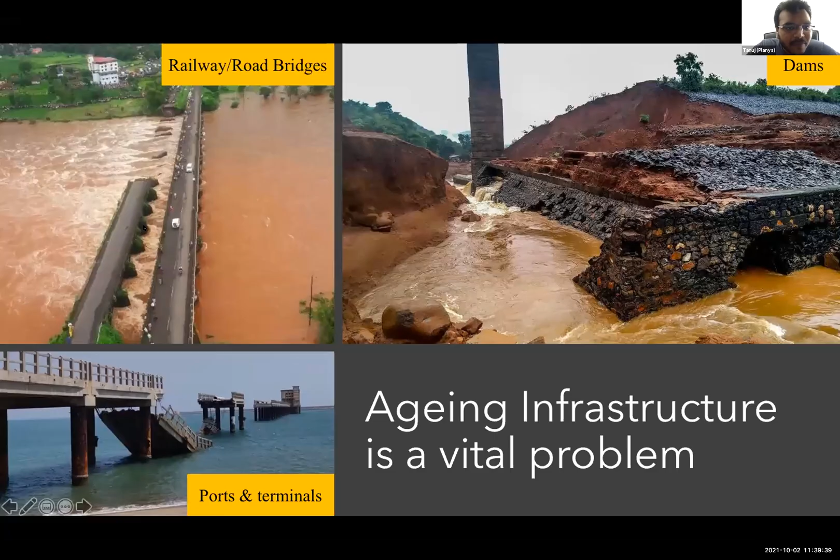So today, divers do these inspections. They go underwater with scuba gear, with cameras, sensors, and collect different data. But being human, going underwater is like going into space - you need a space suit there, so you need a suit here. There are a lot of limitations because you can't go deep, the pressure will kill the person, you can't have unlimited oxygen supply because they cannot breathe through water, and of course there is a lot of safety risk with all these parameters involved. So human divers have several limitations in going to high depths, capturing useful data, and then relaying that to the experts to tell them exactly what the problem is.

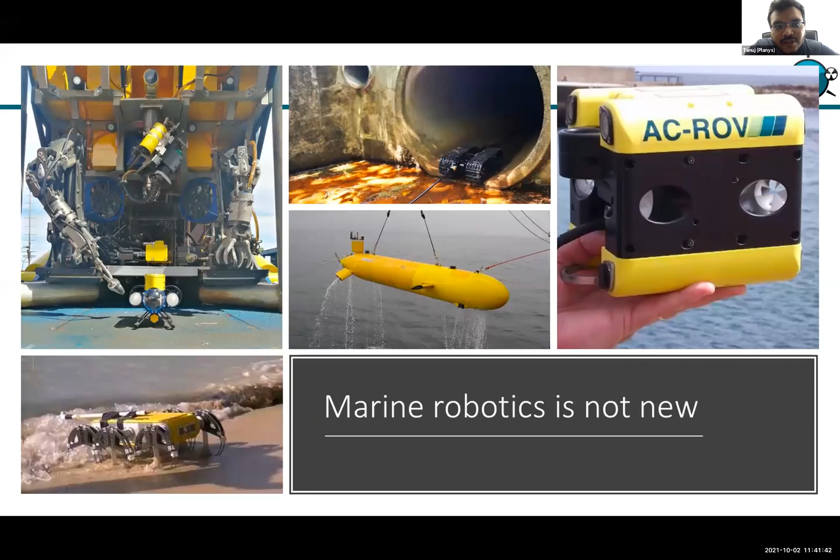So this is not new. The Titanic was found through using one of these.

This is typically the setup that happens. You have the ROV, the remotely operated vehicle, the technical word for an underwater robot that is deployed. It is connected with a cable to a control station. Then you have a ROV pilot, like you have an airplane pilot, who controls the machine from a joystick. And engineers or experts can see the data live stream.

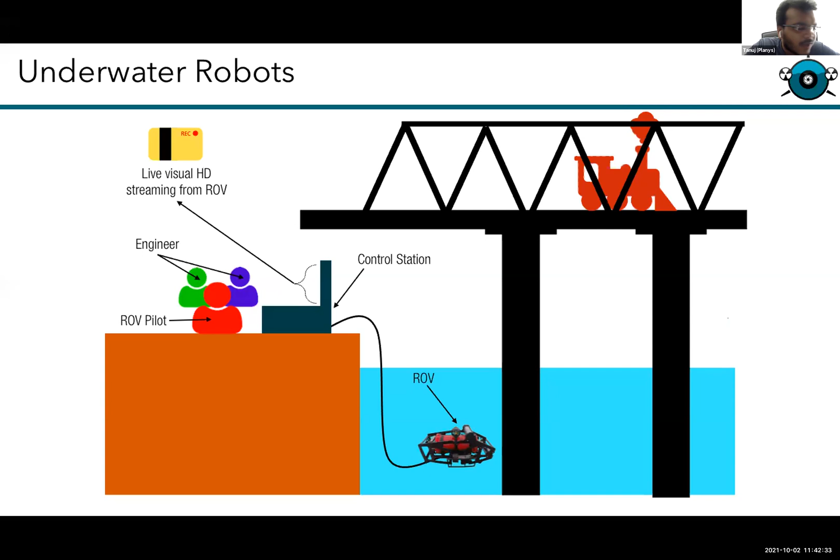This can be done without dismantling the asset, like a bridge. So the trains can go on, but the data collection still happens of the foundations and underwater structures. It's very safe, very robust, with a lot of sensors assisting in these robotic technologies. And there's no battery limitation because the cable brings it power from outside, so theoretically we can have unlimited endurance.

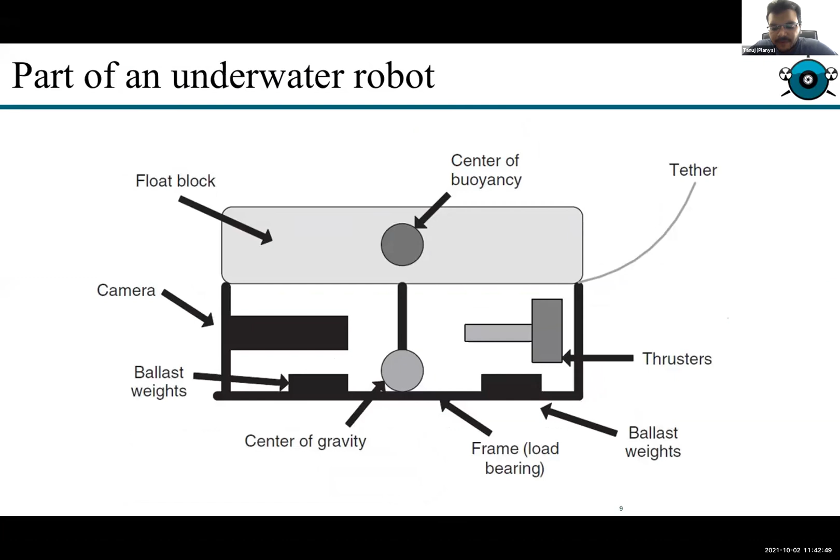So these are the different parts of the robot. As you can see, it's quite sophisticated. You have propellers, cameras, lights, manipulator arms. You have a lot of cabling, and a chassis on which it's mounted. On top, you have an emergency beacon to find it in case it gets lost, or to know where it is. So it's like a small transformer itself.

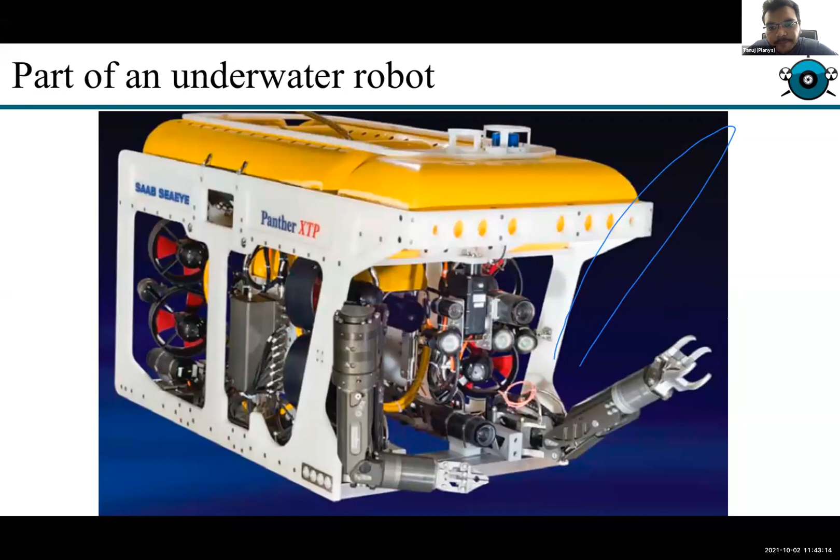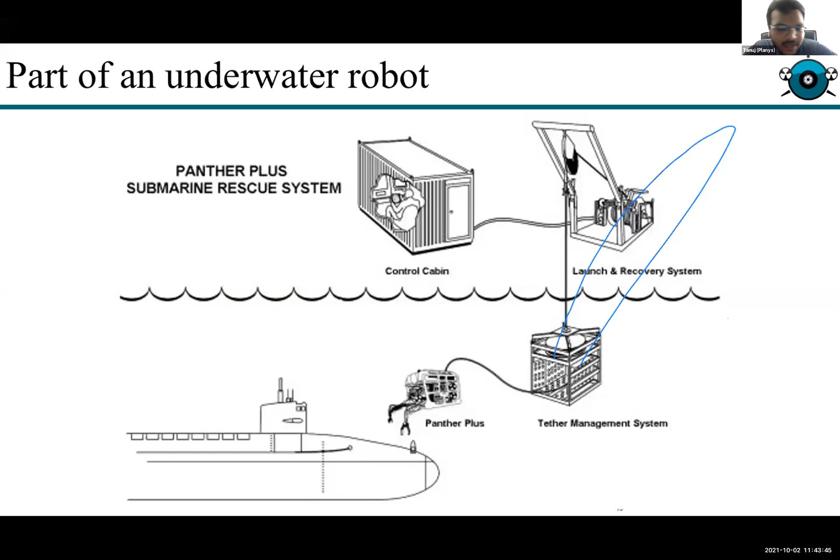This is the setup. On the top left, you see a control room where the data comes in live. You have several monitors, screens, a joystick, and the operator controlling it. Then the cable goes to a launch and recovery system, which is a crane, and it's deployed underwater, and you can inspect submarines, underwater structures, and several things from it.

So the applications for this could be in offshore oil and gas, where you have a lot of underwater structures, and oil is very important today. We know the world is moving to more renewable energy, but as of today, oil is important, and these structures will lead to issues if they fail, like oil spills. Hence inspecting these is very important.

Similarly, port structures are very important for movement of cargo around the world. Dams too, I think I've given enough examples of dams, and bridges as well. People from Mumbai know the importance of the sea link, and if something happens to that, there is going to be a lot of discomfort on a daily basis. So these are the different applications.

Of course, there are more applications, like for defense purposes. Navy could use this for coastal monitoring and coastal surveys. Secondly, you could do a lot of environment monitoring with these technologies for underwater data collection, seismic activity, and so on. So that covers the different use cases, with some photographs.

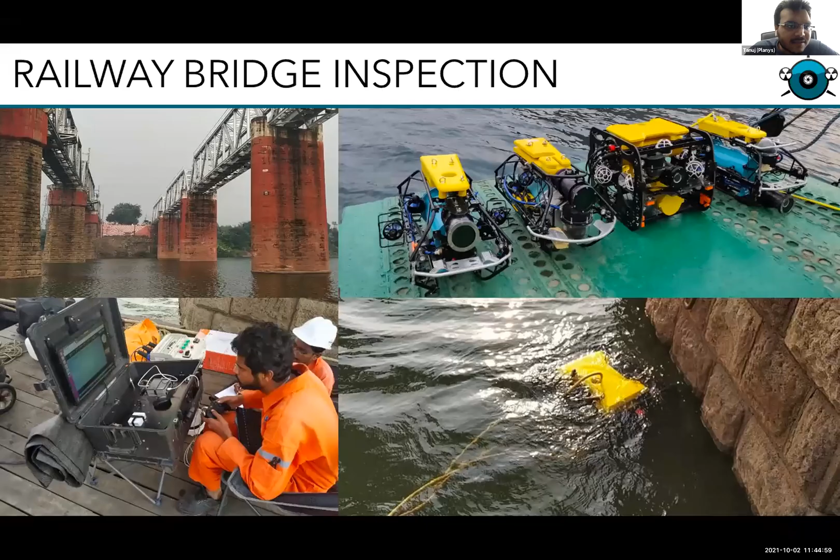Our small company has been using this for the Indian Railways. As you can see, these bridges are very old, built by the British. We use small vehicles, small boats, on which we set up these systems. On the left bottom, you can see that photograph, our operator controlling with a PlayStation joystick on a small screen. We install this and move the robot in water to collect different data.

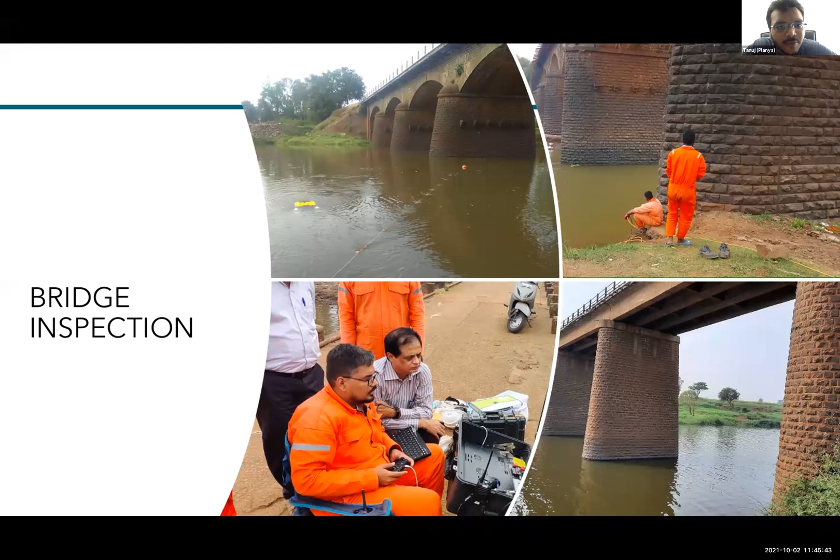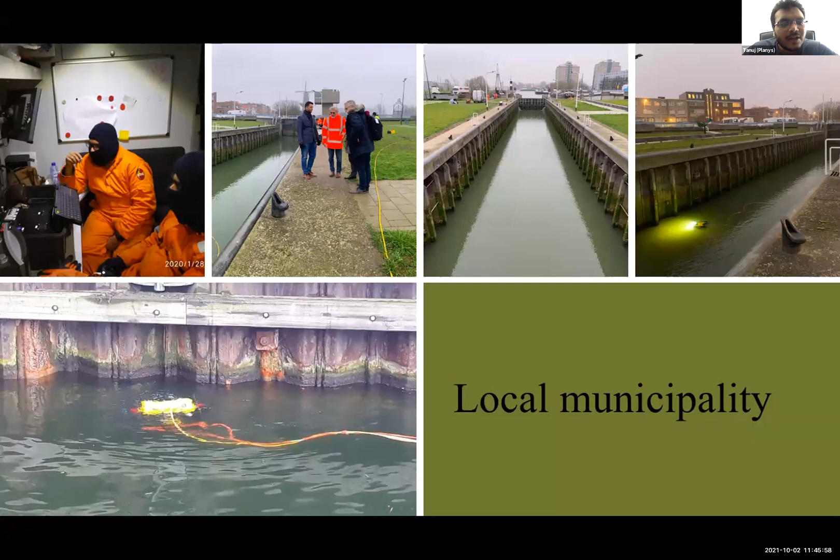We've also done some work for some customers abroad. These type of structures are not seen in India majorly, but these are local municipalities that have these assets. So these are the real use cases where our technology has been deployed.

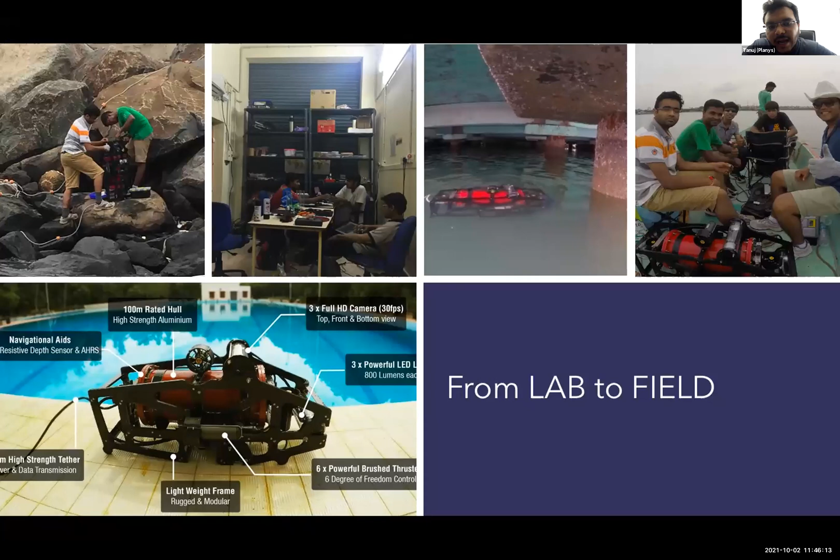To talk a little bit about us, we started off as a small lab in a dungeon in our campus. This was one of our first products we built that went to the field, and it was a good journey of learning, experiments, and field execution.

Without any ado, I have my last video here that I'm going to play. This talks about bridges. As India has several bridges, these are some unfortunate cases that have happened in the past where bridges have gone down.

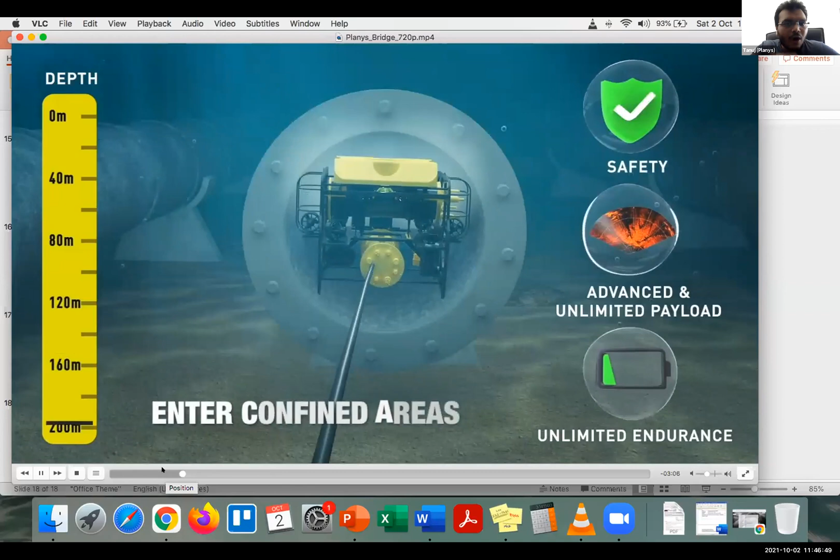As Planys, we have built these systems that can help in detecting or testing underwater. These robots go underwater, they can see defects, and we can go long inside pipelines. It is very safe to use these machines, and much better and accurate than a human collecting data.

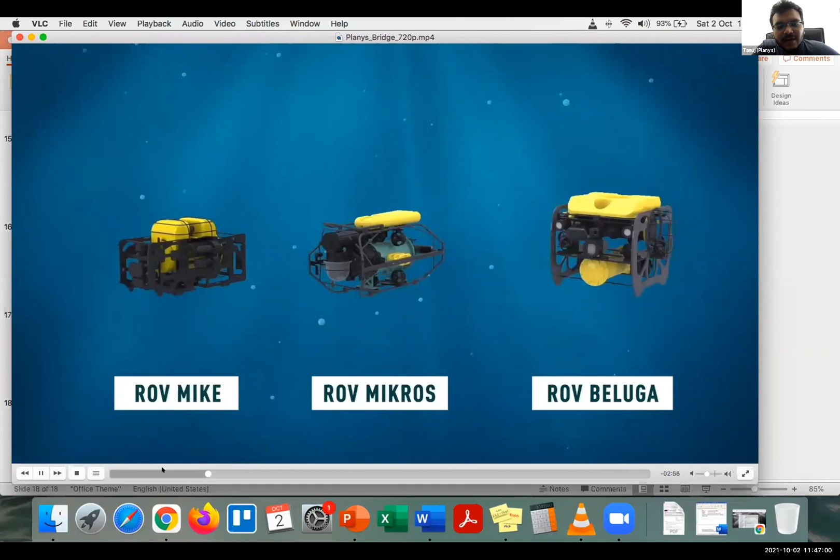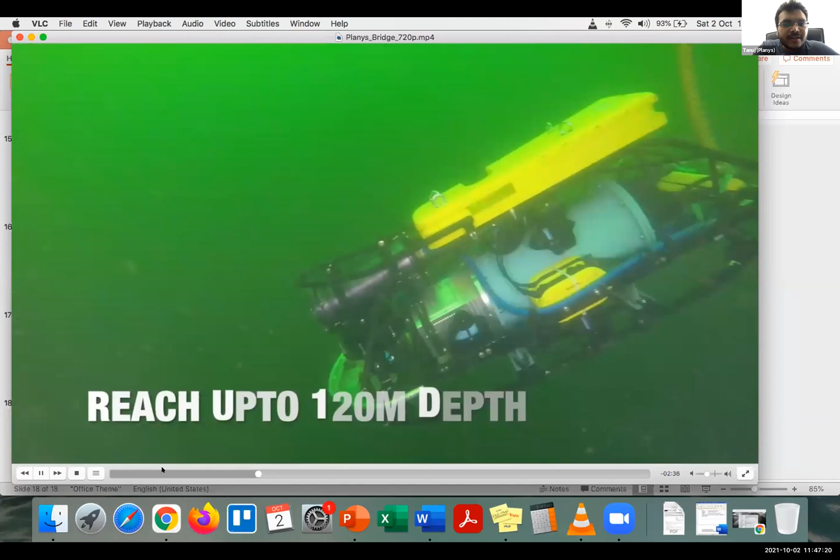The robot has several parts to it: propellers, cameras, different sensors. As you can see, it is a very small machine. A two-man crew can release it in water, and then the pilot controls it with a joystick from the outside, and it self-propels itself. It is neutrally buoyant, and we can go up to 120 meters of depth, which is more than 350 feet. That's how the setup works for controlling this.

These are actual defects found while testing these assets. Imagine you're driving on a bridge and the bridge has these issues - of course it's a big concern to anyone. It's a public health and safety problem, because if something happens to the bridge, there will be a catastrophic failure.

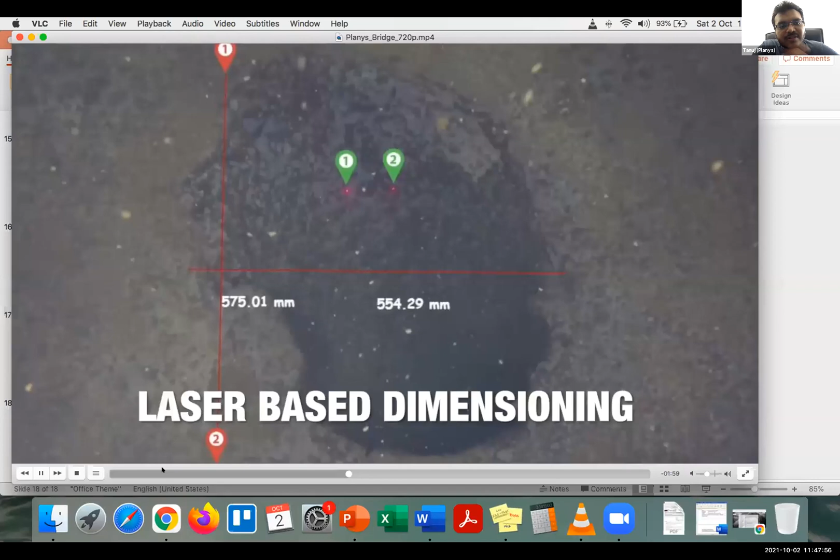We have done a lot of these bridge inspections, and we help authorities like the Indian Railways take measures. We have lasers which allow us to size the defects. Indian waters are very murky, so we've built technology to do inspections in murky waters - this is basically innovating as we go along.

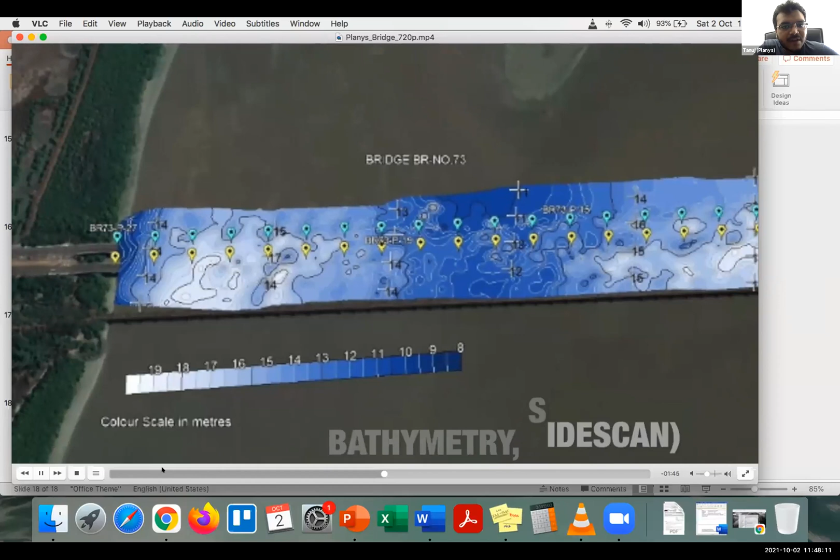We can also check what is happening on the bed of the sea or the river, and inform authorities if there are any unidentified objects. These are different tests - I'll just skip this in the interest of time.

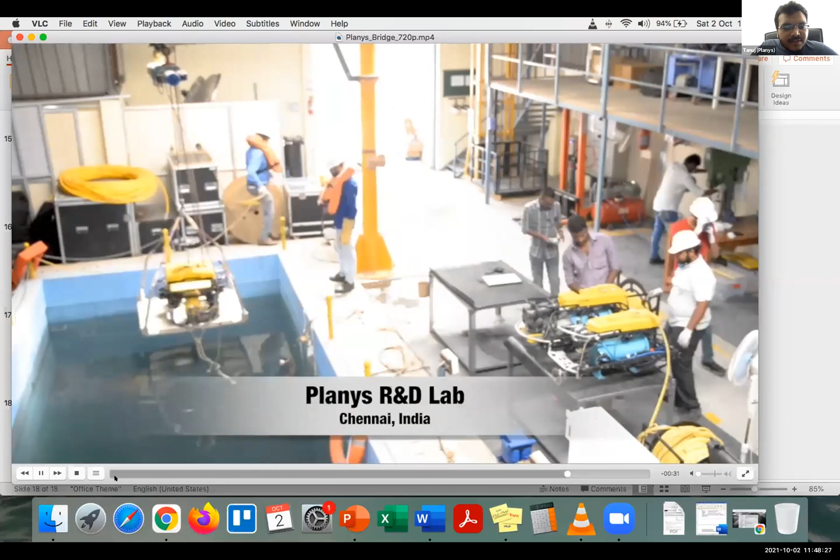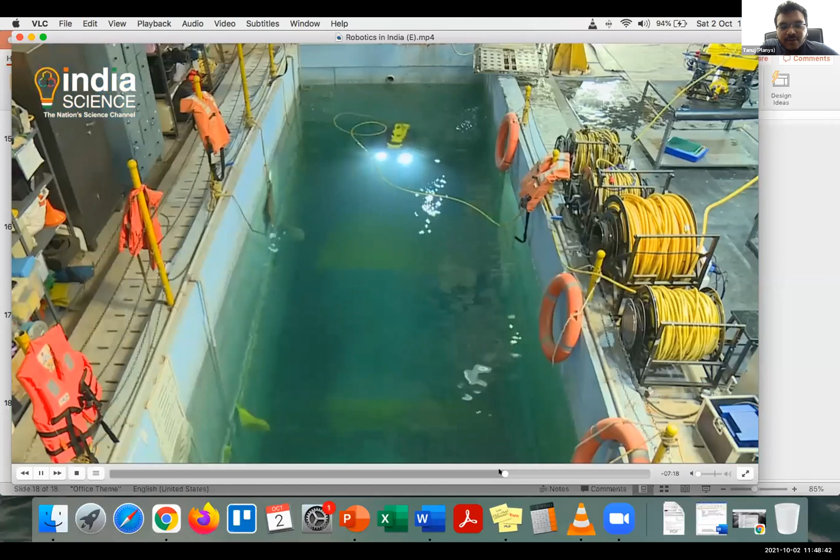I'll just play another video. This is a video that'll give you an estimation of our facility. We have our own pool in our office where our technology is built. This is what it takes to build robotic technology as the company gets older, to give everyone on the call an understanding.

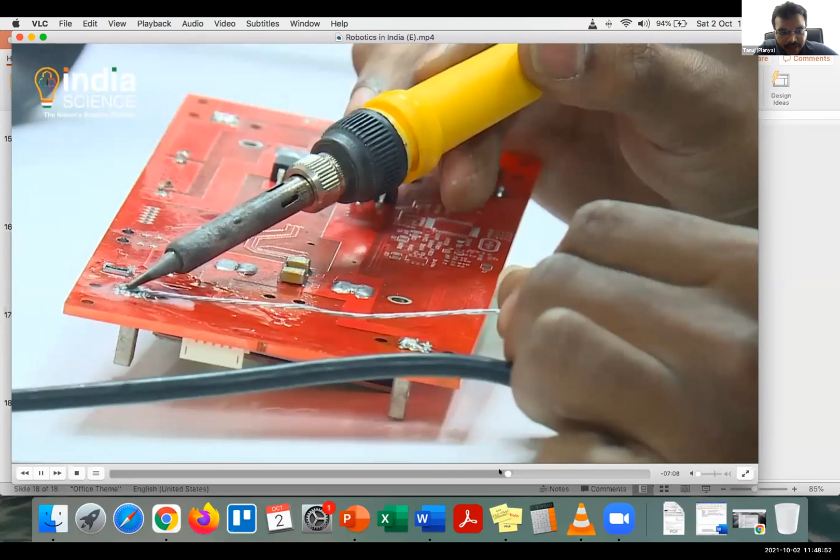We have people who do a lot of electronics - these systems are designed and developed here. A lot of expertise goes into it, from computer science to electronics to mechanical engineering, and core competencies like physics and mathematics are the basis of everything here.

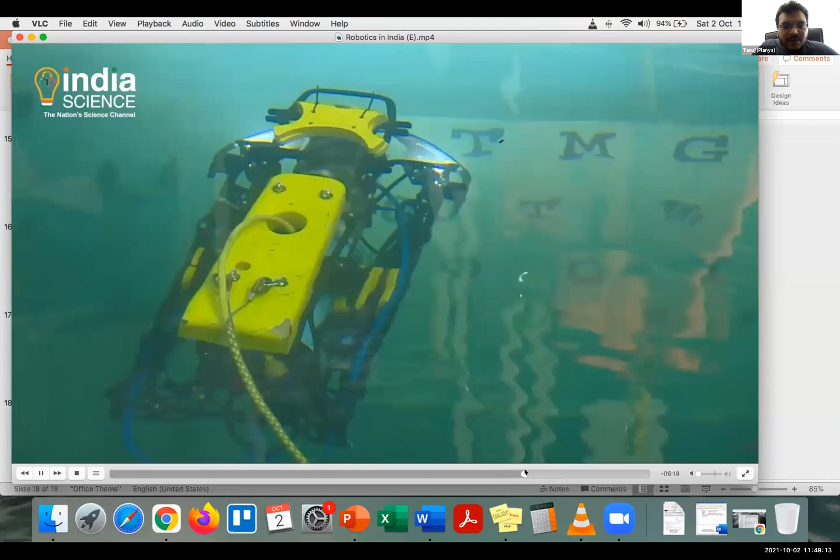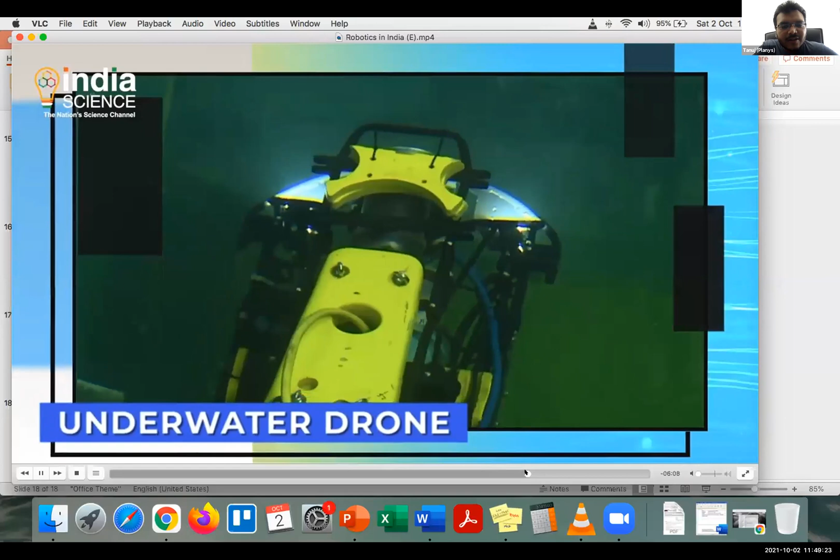These are some close-ups of how these operations are done, to give you a better perspective. As I mentioned, they have lights on them, they have cameras on them, and on field we deploy them. A lot of safety is there - even outside water, our people wear a lot of safety gear.

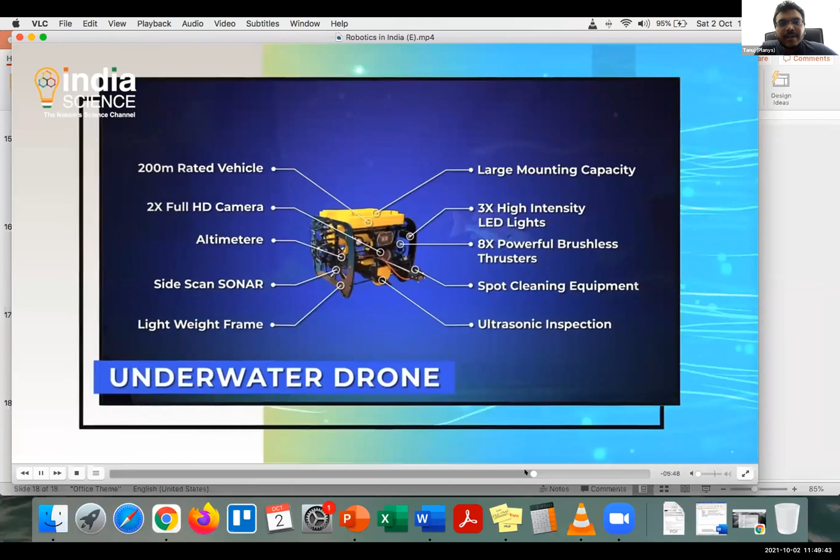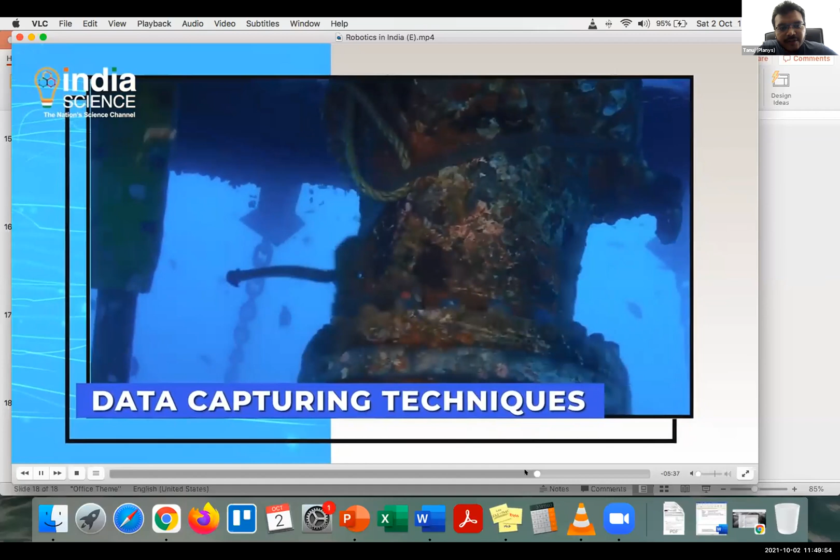We can go up to 200 meters of depth. It has several sensors into it: carrying capacities, altimeter, sonar is a very commonly used sensor. There's a lot of data capturing done from different sensors, like anchor chains for offshore platforms, which is of interest because if the anchor chain breaks, the offshore platform is at risk.

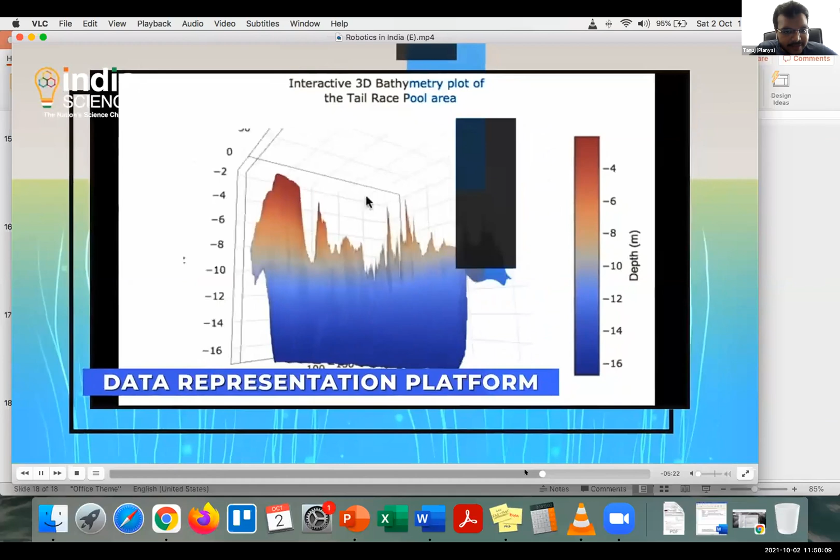Once the data comes in, there's a lot of artificial intelligence, a lot of image processing, a lot of new age technologies that are put into this for further analysis and interpretation of data. Then that is submitted to the authorities for decision-making on repairs and maintenance.

So yes, that is Planys - that is what we do, that is what our robots do in India, and we are very proud to be helping Indian authorities as a company in maintaining their assets.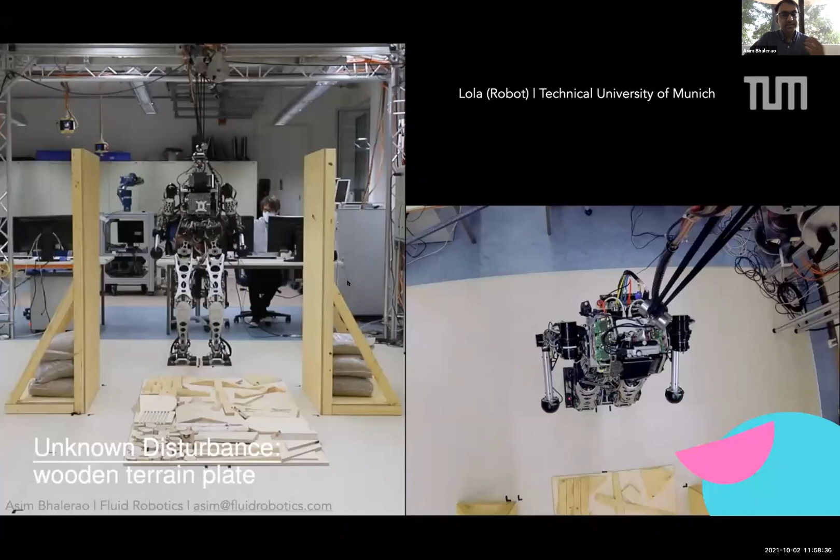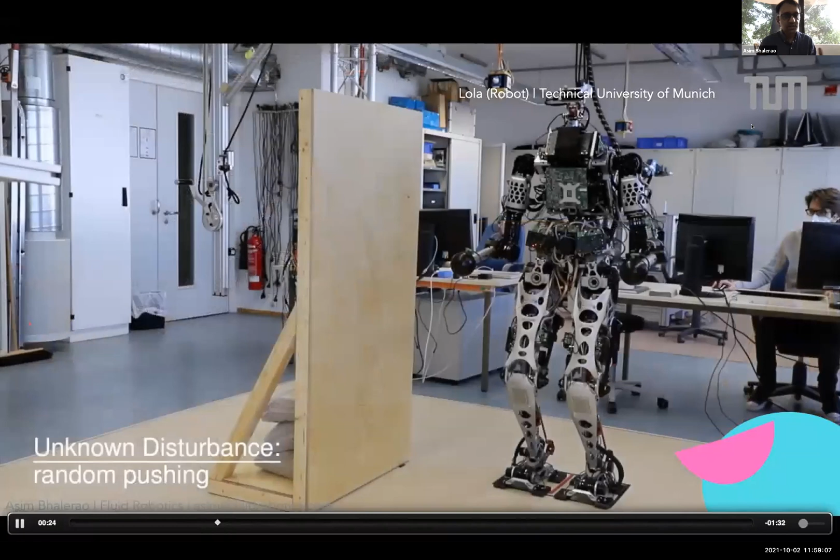So I'll show you a few different examples of terrestrial robotic systems that have been developed over the last several years, maybe even a couple of decades. This is one such system - humanoid robotics is a big field. I'm sure some of you have seen videos of a company called Boston Dynamics, based out of the US, where they build humanoid robotics as well as multi-legged robotic systems.

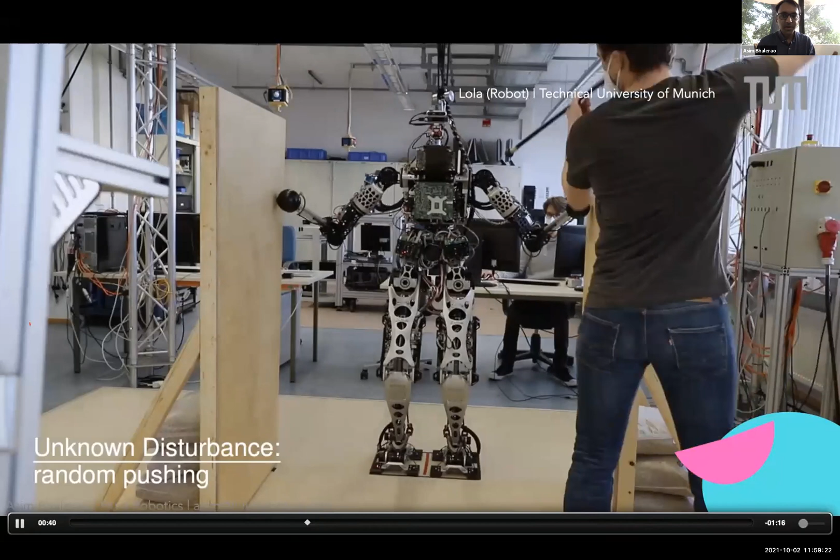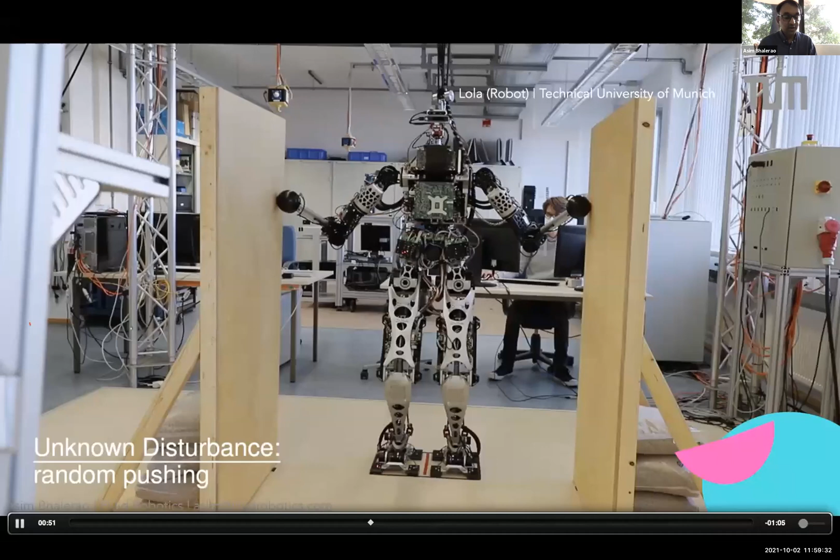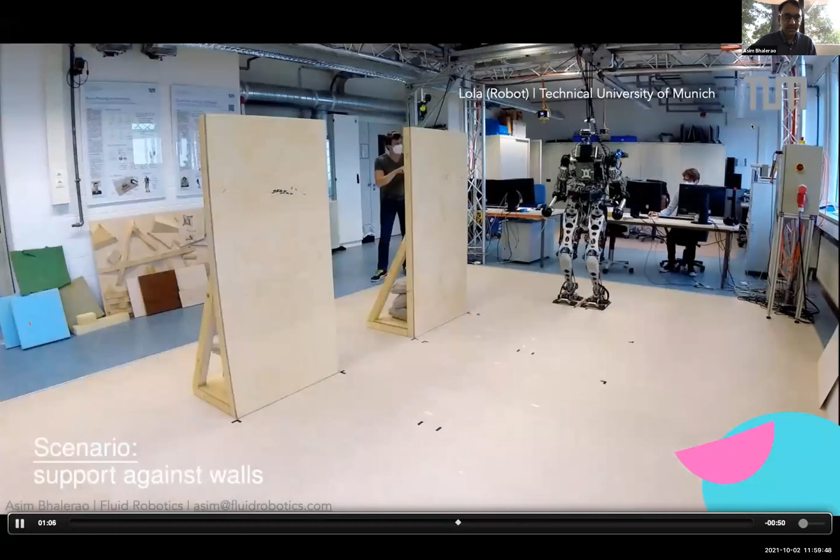So this is one such system, extremely complex. We take our body for granted - when we're able to do complex tasks like walking up and down stairs, jumping off chairs, running around, running over obstacles, it's something we humans take for granted. And when you actually come down to teaching and building a machine to do something like that, you truly understand how lucky we are as human beings, being able to do these kinds of complex activities that otherwise would not have been possible.

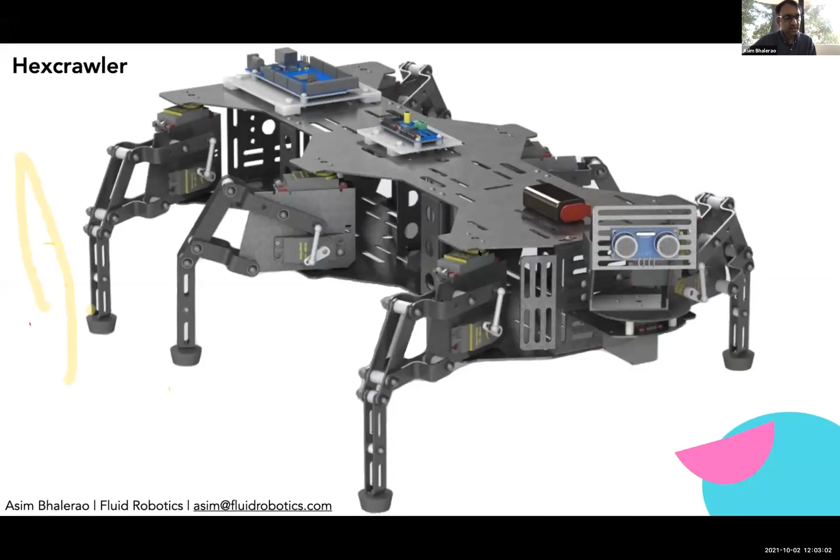Here's another photo of a multi-legged robotic system that can navigate complex environments. So you saw the little dog with four legs. This one has six and can actually do slightly more complex control and navigation.

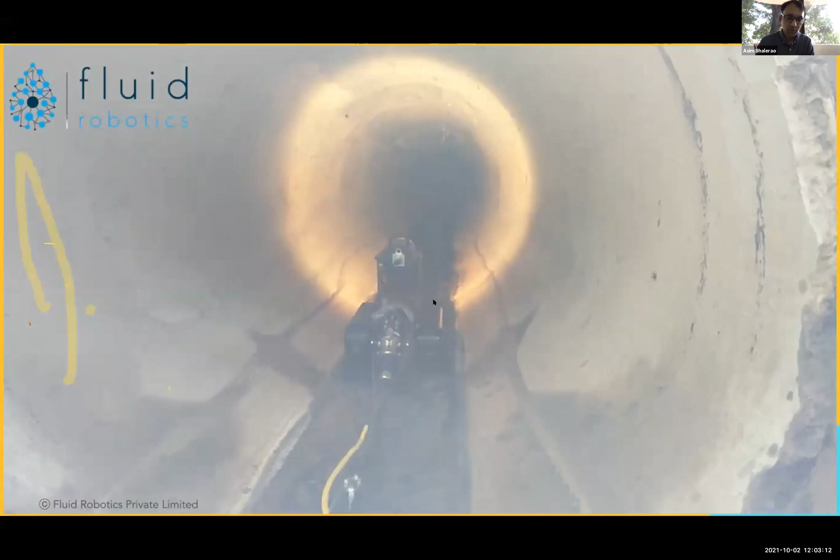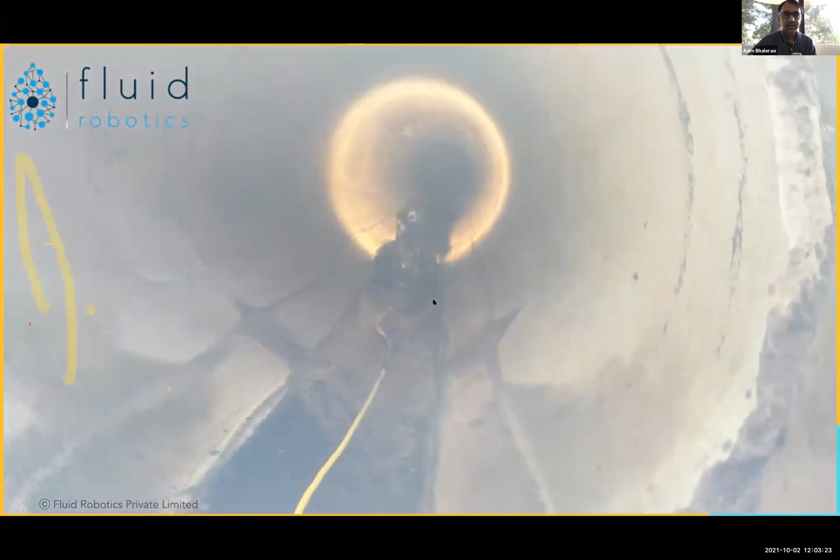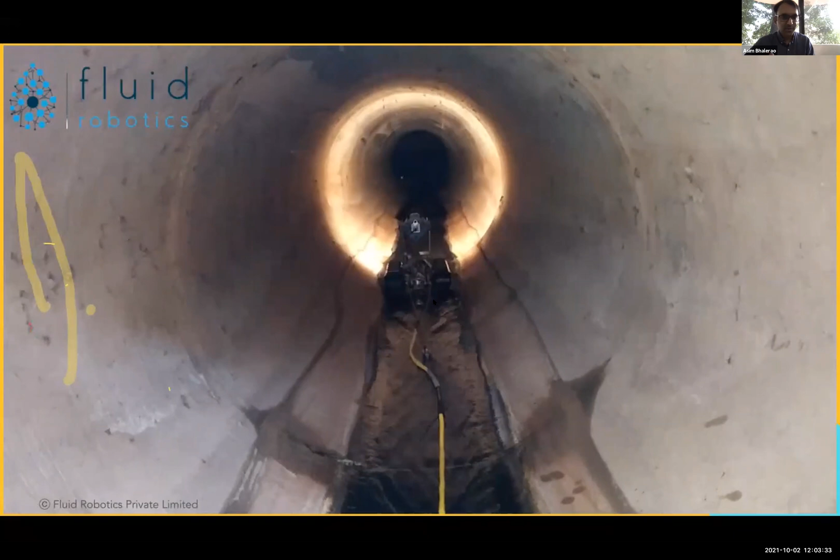This is another application that we build at Fluid Robotics. This is a robotic system that we send inside of pipelines underground. So if you're in one of the major cities, Mumbai, Delhi, Bangalore, we have these robots traveling underground, without anybody noticing, gathering data about the health of pipelines and the underground infrastructure to help cities better manage that infrastructure.

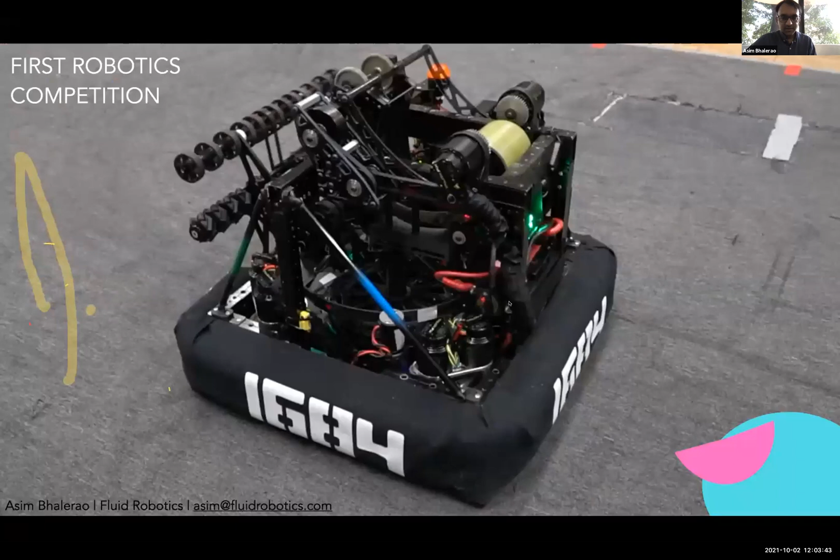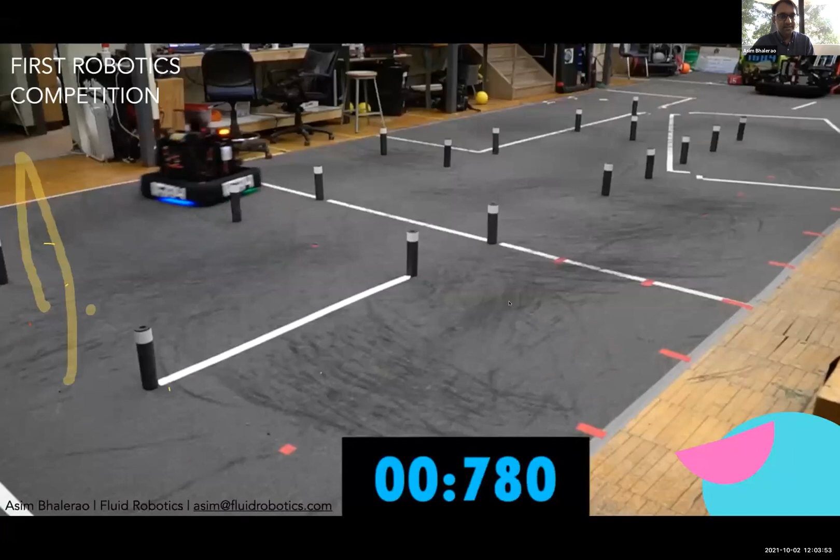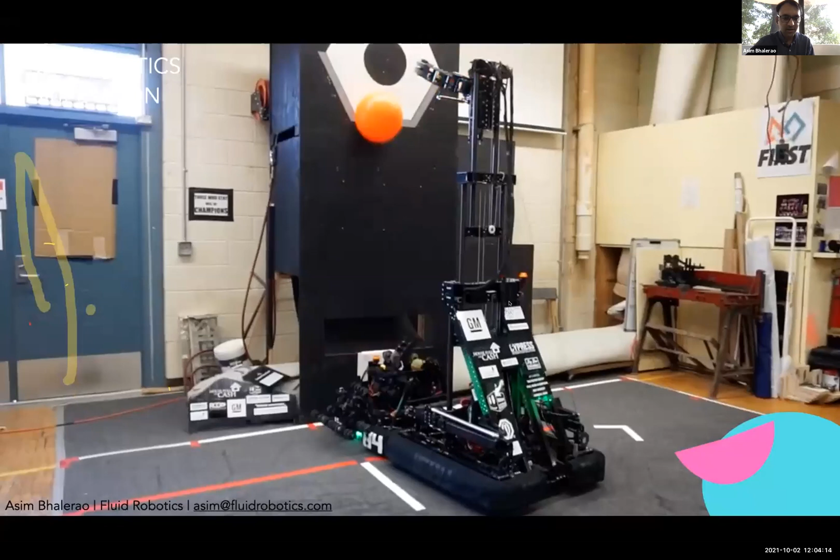And here's something that is very exciting for myself and for the innovation story team as well. This is a terrestrial robot, designed by school students who are as old as all of you guys, for the First Robotics Competition, the FRC competition, where robots are built by students to solve different kinds of problems. You can see the robot here navigating across a complex environment, able to pick and place objects, and do all kinds of complex maneuvers. This is a very interesting application and robotic design that students can build.

So coming back to the definition of what a robot is, it's an autonomous machine that can identify its surroundings. So how does a machine identify its surroundings? It does that using sensors.

I'll move ahead here, my screen's a little stuck.

So what is a LiDAR? A LiDAR is basically a sensor that uses pulsed light to measure distances. What you see on top of the car is a more miniature, cost-effective version of a LiDAR that anybody can purchase and use. It sends light beams and spins so it can scan in 360 degrees. Based on the reflected light that comes back to the sensor, it can identify basic obstacles present in its path. This is the technology that a lot of robots, including self-driving cars, use to sense the environment.

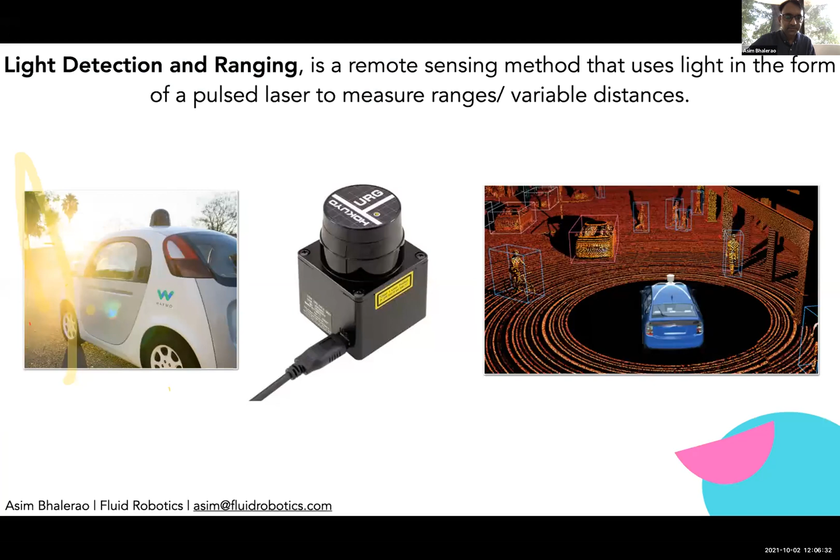So what is a self-driving car? It has a bunch of sensors like this to sense the environment, and it has basic controls — a steering wheel, brakes, an accelerator — so it's able to control the motion based on whatever input it is getting.

Once you start monitoring the environment, once you start getting LiDAR data or the camera starts taking photographs, you have to teach the car, teach the software that runs on it, to recognize what is in its environment and take the right decision. If it sees a car in front, it should stop. If it sees a red traffic light, it should stop. If it turns green, it should move. If it sees a person crossing the street, it should stop. All of these decisions are based on how it perceives the environment and what kind of logic is built into its decision making.

Machine learning and neural networks are one way to train a robot, to train the software that runs on it, to identify objects and classify them as a person, a car, a bus, a traffic light, a building, or a zebra crossing. So it's a combination of a hardware system — the device, the car, the electronics that run on it — and intelligent software that helps it make the right kind of decisions.

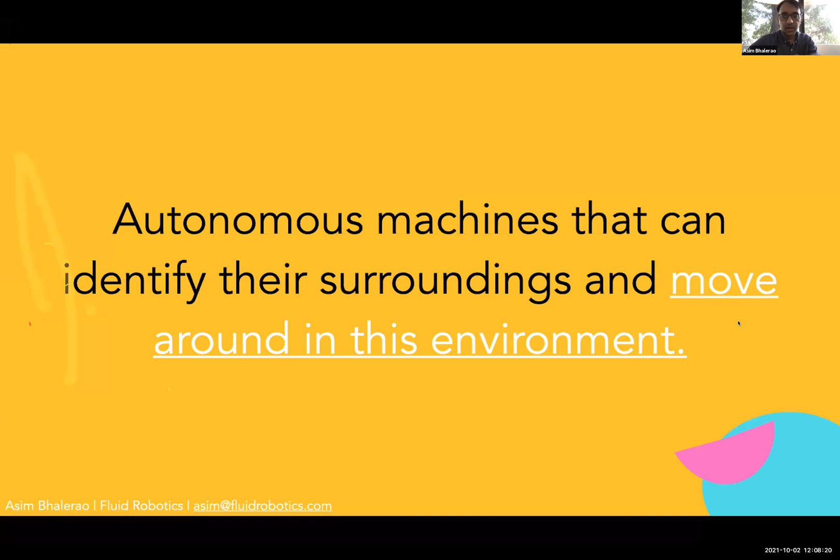Moving on to the last point — it has to move around in this environment. Obviously you have brakes, a steering wheel, wheels, an accelerator. But how does it make those decisions? There's a very simple concept of a control system.

You have on the left here a desired state in which the car needs to perform. It is getting input from its sensors, and it takes what is the desired state—if it's green, no obstacles, keep moving at a safe speed. That's a desired state. So based on sensor input, it has to modify the way it performs. If there's an obstacle, it will control its steering. If it needs to stop, it will apply the brakes and so on. Then the car moves to the next state, and this keeps happening in a feedback loop as the car keeps driving itself continuously from one place to another.

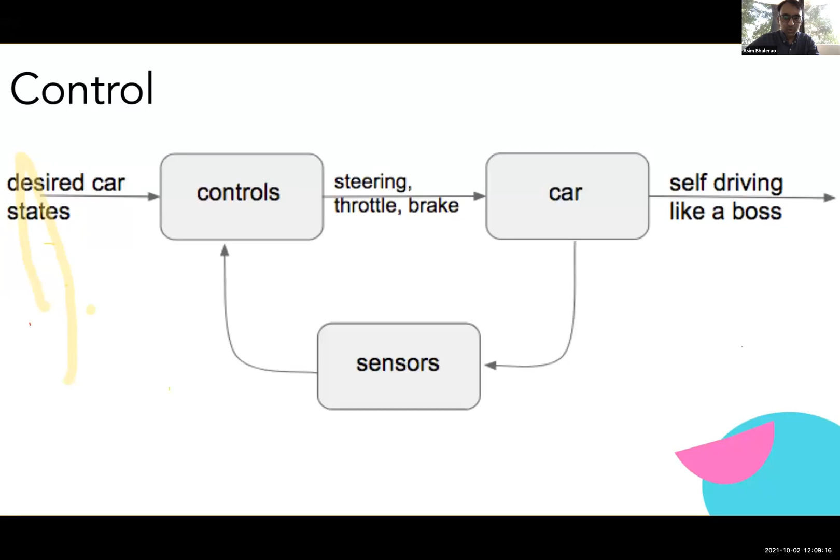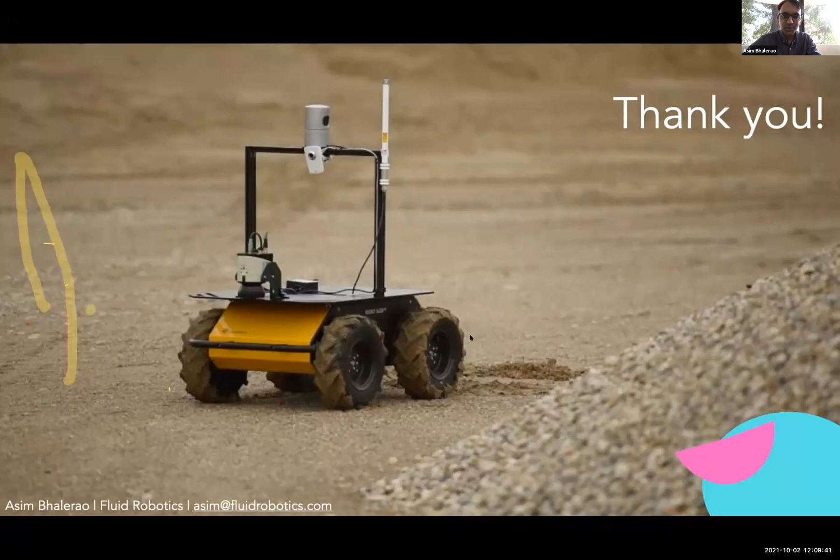The takeaway here is that robotic systems are very complex and interesting, requiring good knowledge of physics and mathematics to build. But with today's open information age, you have all the information you need to build one of these systems. With that, I'll stop this presentation. I'd love to answer any questions you might have.

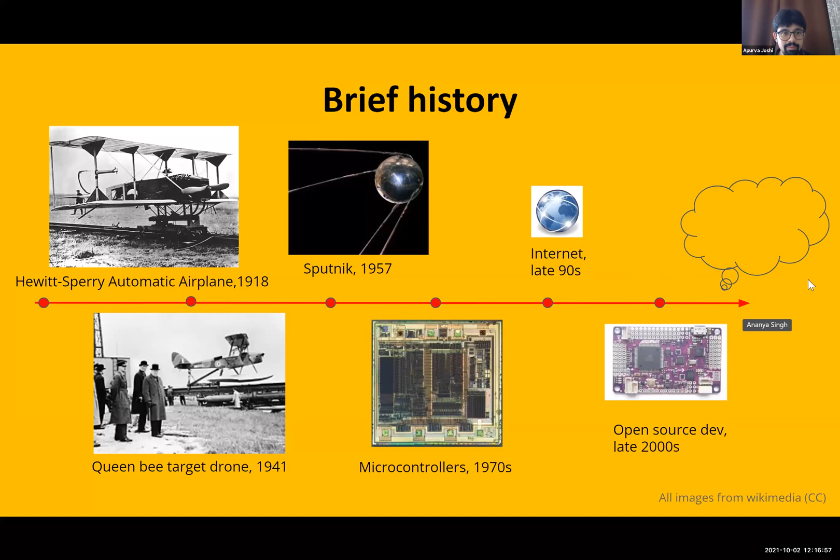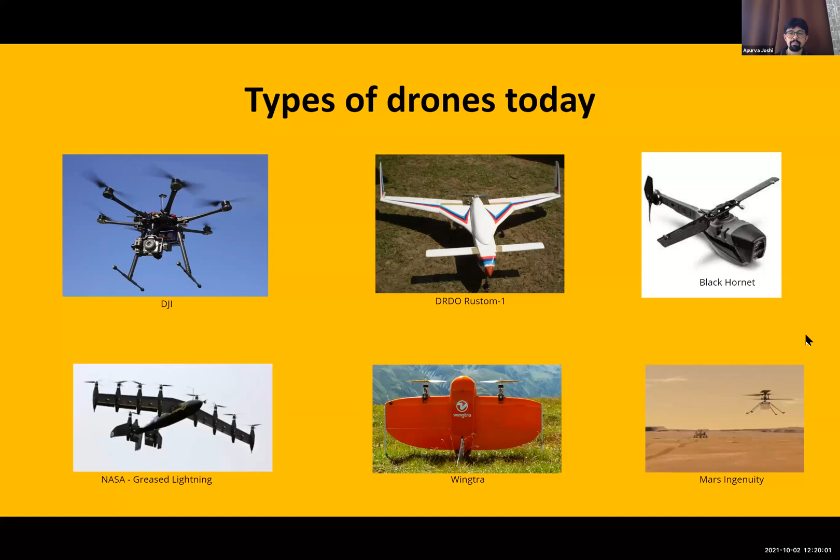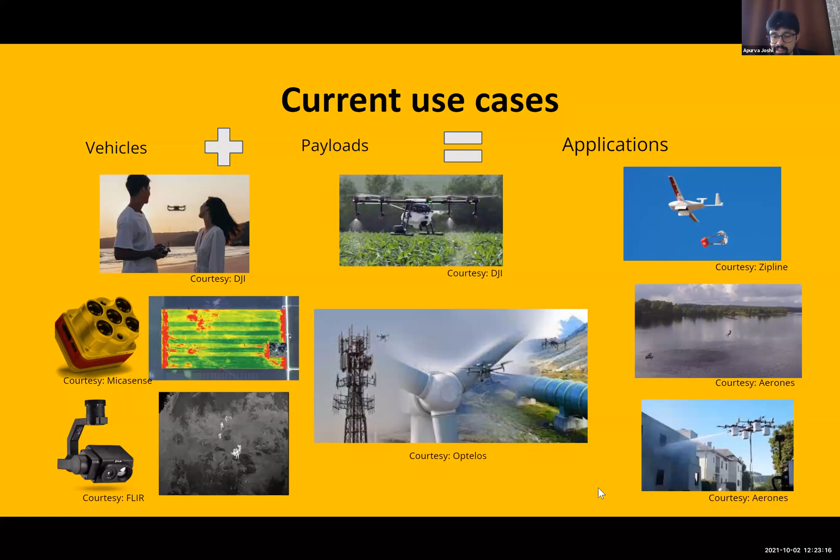Then there are some applications where they're used for delivering medicines to very remote areas. This is a company called Zipline doing that in Africa, and there are some recent developments of that sort even in India. They carry blood supplies and vaccinations to remote areas difficult to reach by road. Then there are applications where they're used to rescue people, for example to fight fires. So the list is getting bigger and bigger by the day.

So what's next? What's happening in the labs? That's where I do most of my work. Sensors are getting better, so we can perceive the environment better. Computers are getting faster and smaller, so you can build more AI, train them to do better things and be smarter. Communication modules are enabling drones to talk to each other and make decisions based on what their neighbors are doing, so there's more cooperation between them, and that all leads to more autonomy.

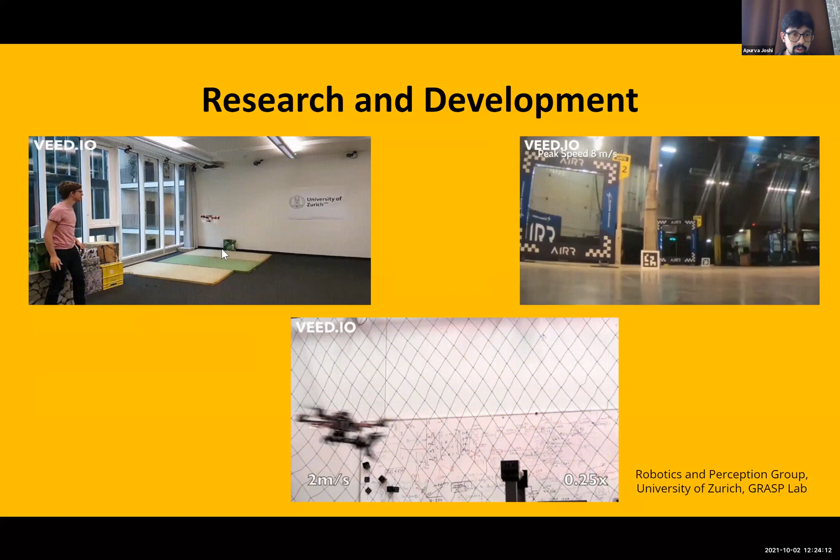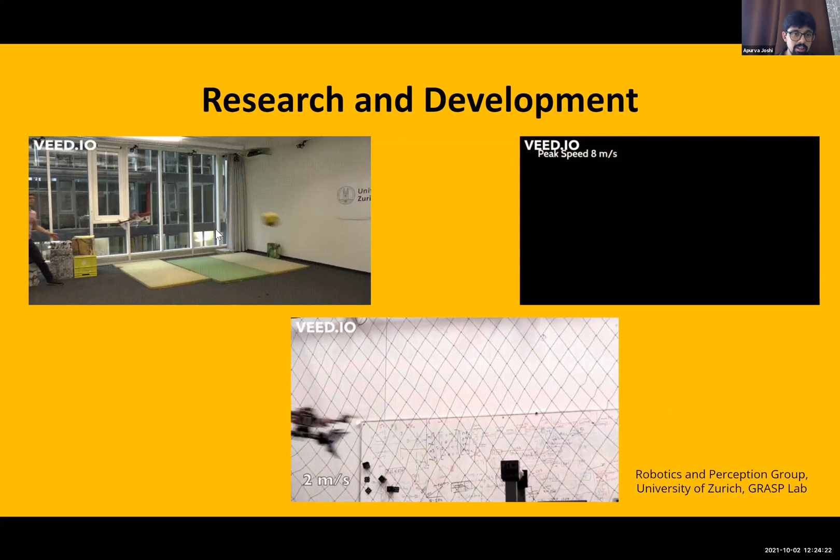So you can see that this guy tried to harm the drone by throwing a ball at it, but the drone was capable of detecting that something dynamic and fast moving was coming towards it, and quickly changed its trajectory and avoided the collision.

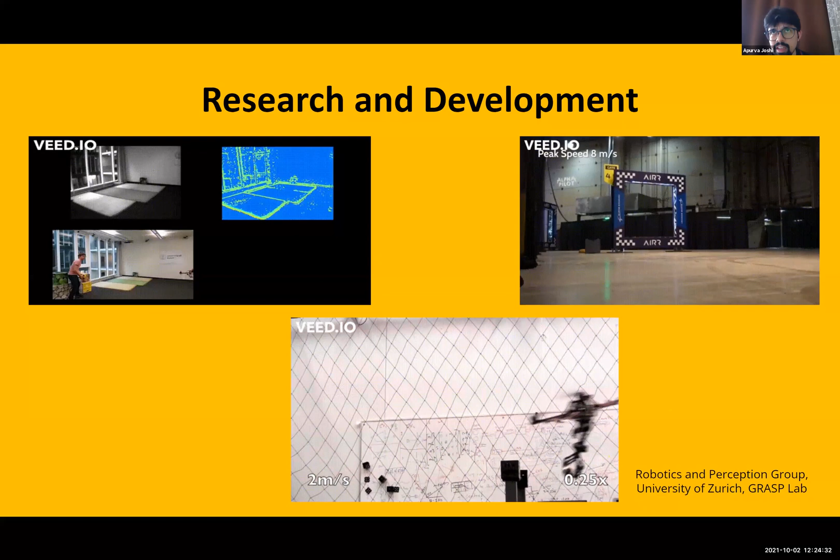Over here on the top right, you have the first autonomous drone racing league that was launched a year or two before, and they move as fast as 5 to 8 meters per second, and it's improving by the day.

Then at the bottom, you have this robot which has an arm attached to it, and it's able to grasp objects, leading to applications like robotic painting, carrying, or manipulating different things while in the air.

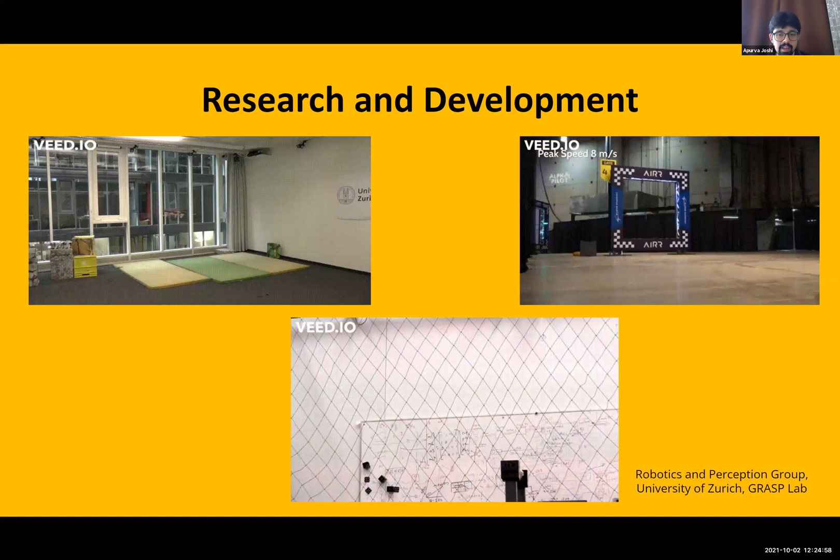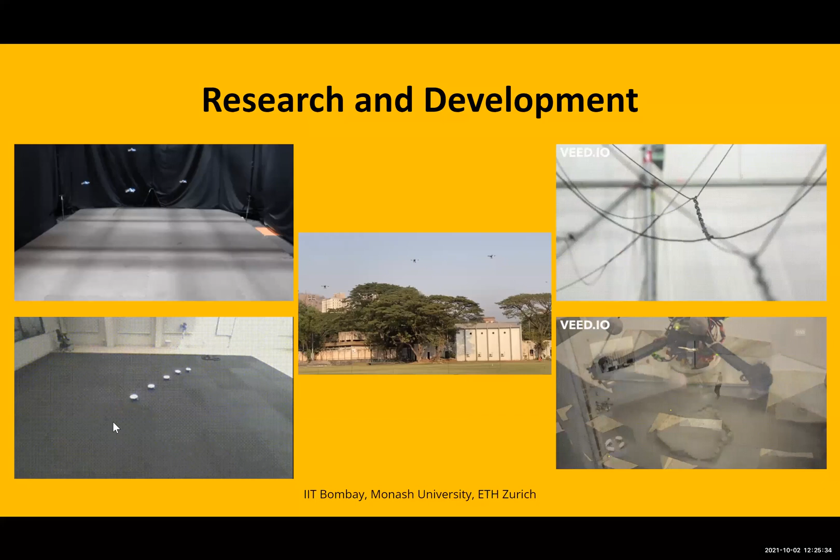We've also done some work on search and rescue, wherein multiple drones can be deployed in multiple areas to search for survivors. They cooperatively scan a bigger area than one single vehicle, so you can cover more ground and provide quicker rescue and deliver payloads to those in distress.

Then on the right, you have some drones building a bridge. This is work done at ETH Zurich, which is still quite difficult to do in the real world, because they have a very good sense of where they are in the environment using motion capture cameras. But this is something you will see very soon in the real world.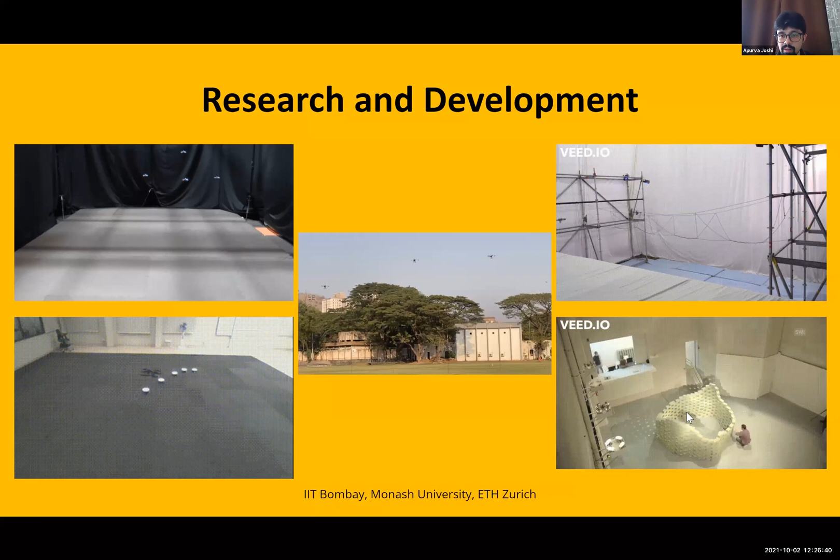Then there are robots carrying bricks and building structures. Again, this is an indoor environment, and this is something that will transition from lab to society really soon. So that's where I believe the future is.

We need a lot of work by people motivated enough to work really hard on these problems. Like the other panelists said, physics, maths, STEM essentially form a really important role in making this successful, in taking stuff out from lab to society. We need expertise from all sorts of domains to reach that goal. There's application in agriculture, in medicine, in disaster management, in logistics, in all sorts of fields. So it's wide open for everyone to be creative and really make an impact.

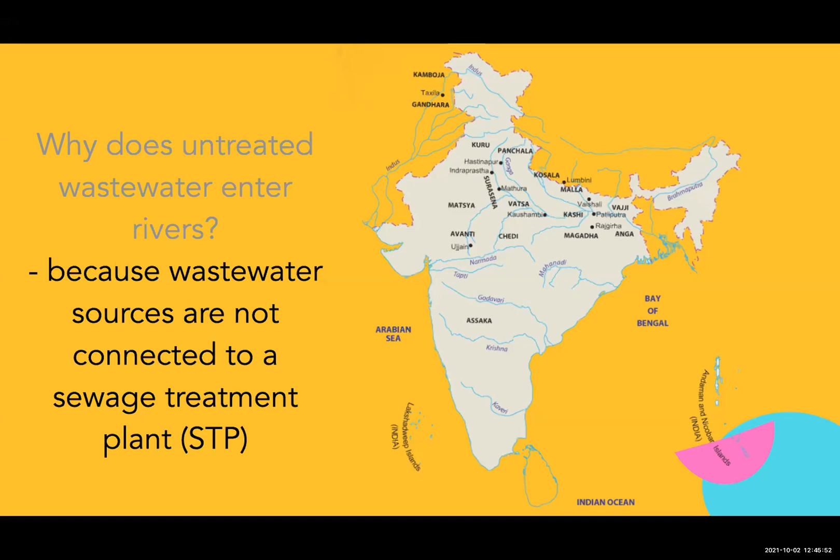Now we had to ask ourselves again, the second question: why does untreated wastewater enter rivers every single day? Why is there untreated sewage, why is this dirty water leaving our homes, leaving industries, and going straight into rivers? The answer was because wastewater sources are not connected to a treatment plant. The wastewater that should leave our homes should get treated in a treatment plant, but it doesn't reach a treatment plant, an STP. So this is what we realized, the answer to our second question.

Now then we have to ask ourselves again: why are wastewater sources, like homes, industries, not connected to a treatment plant? This was again going deeper and deeper into trying to really understand the problem.

So the question, why are wastewater sources not connected to a treatment plant? Because it is easier for whoever is building, constructing buildings, industries - it's very easy for these builders or contractors to connect whatever new infrastructure they're building to a storm drain. If you connect to a sewer pipe, that pipe should eventually get to a treatment facility. But whenever a new building is constructed, it's very easy for the contractor to connect to a storm drain instead. Now where does the storm drain go? It goes into a lake, a river, or the coastline.

So this is what we were learning as we were digging deeper and deeper, and these were questions that took us months to answer. It took several discussions with government engineers, with government authorities, discussions with other stakeholders, and a lot of reading reports out there, Googling the state of India's rivers or state of wastewater infrastructure. These were questions that took us months to really get clear answers to, and today, in hindsight, that was probably the most important part of the journey that we embarked upon.

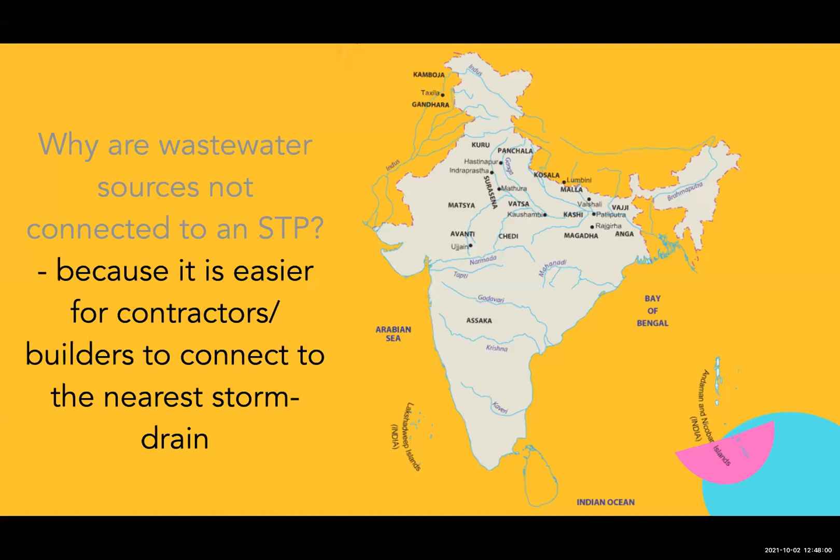So having answered this question - it's easier for these contractors to connect to a storm drain - now going one level deeper, asking ourselves why the fourth time, why is it easier for them to connect? Because existing sewer pipelines are old, they're damaged, and they're often overflowing. This is something a lot of you can see out on the street - wastewater just coming out of the ground through some manhole cover and unfortunately dirtying that entire road nearby.

So this was close to the final answer we were really looking for. We saw that existing pipelines were out of shape, extremely dirty, damaged, and overflowing in many places across the city. Then we got to the fifth why: why are they damaged and why are they overflowing? The answer to this question opened up our eyes to what the core issue was. The issue was the fact that underground pipelines were not mapped. The government did not have maps of their wastewater infrastructure. Today, if you go to a municipal corporation and ask where these pipes underground are, there is very little information currently available.

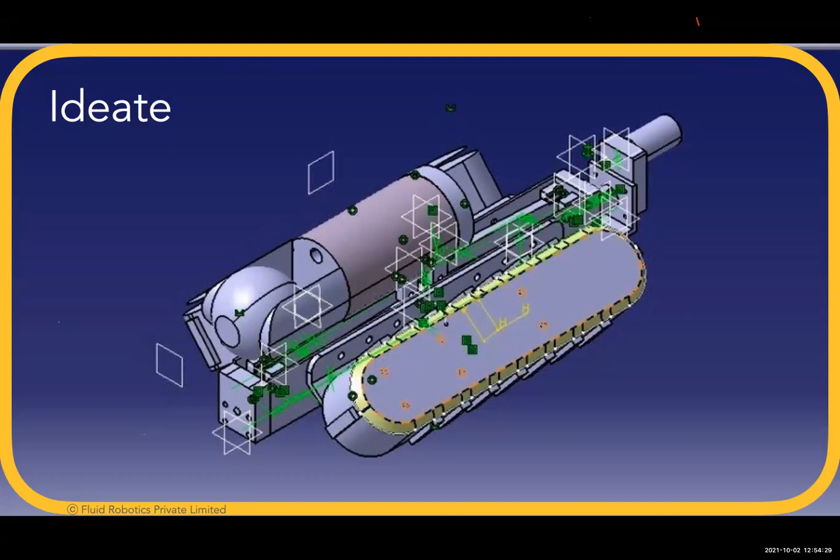And we'll be able to tell the government that they need to go dig right here and fix this problem, and solve whatever issue they're having. So this was the ideation process, and it can happen on a piece of paper, it can happen in AutoCAD, you can use whatever tools you want in this process.

And the next step was prototyping. Once you've got your ideas clear, you want to build something. You start thinking about what you need to build - do I need wood? Do I need metal? Do I need plastic? Do I need motors, and how do I control the motors? You start thinking about the technology. So really, you come to technology much later in the process of design thinking.

In design thinking, we spent more than 5 to 6 months just racking our brains around the problem before we even got to what technology needs to be built, what needs to be produced. So this is like one of the first prototypes that we built.

I was back in the US still, working a full-time job building surgical robots, and on the side I was trying to build all of these prototypes, trying to figure out if we could really solve this problem that we now understood really well. So we started building these prototypes of robots that could map and inspect pipes.

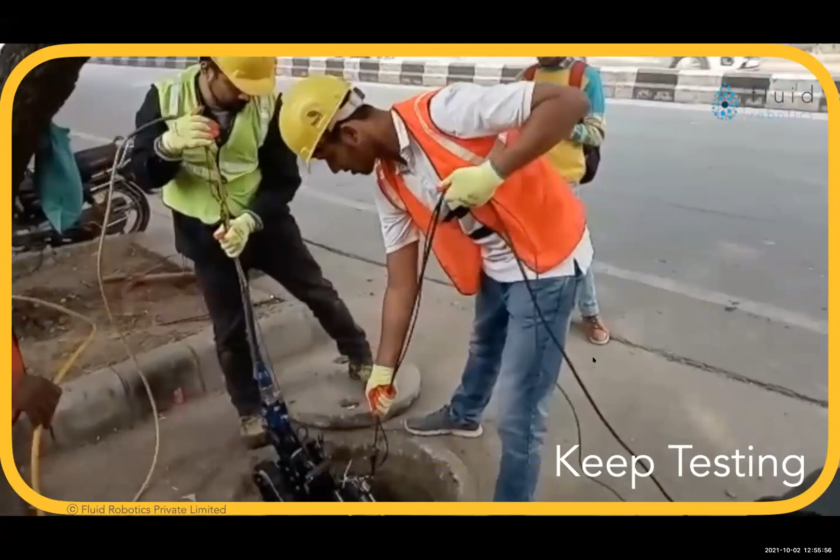And then you test. We got prototypes and started testing them. Where do you test them? We did a bunch of testing inside of a lab, inside of closed environments where conditions are more ideal, and then we looked at real world testing.

This is how our testing process started. We're putting robots into actual pipes, where the government was facing real problems. So this is the process of testing.

Initially we tested our understanding of the problem by talking to more and more people. We talked to 10 to 15 different engineers in cities. That was the testing process where we tested our beliefs about the problem, what we felt the problem was. And now in the prototype and ideation phase as well, we're doing more testing.

Testing is nothing but experimentation. I have this device, or this idea, and I'm going to experiment whether this is actually true, whether my understanding is really true. Keep asking more questions, keep trying new things out, and really see how things progress.

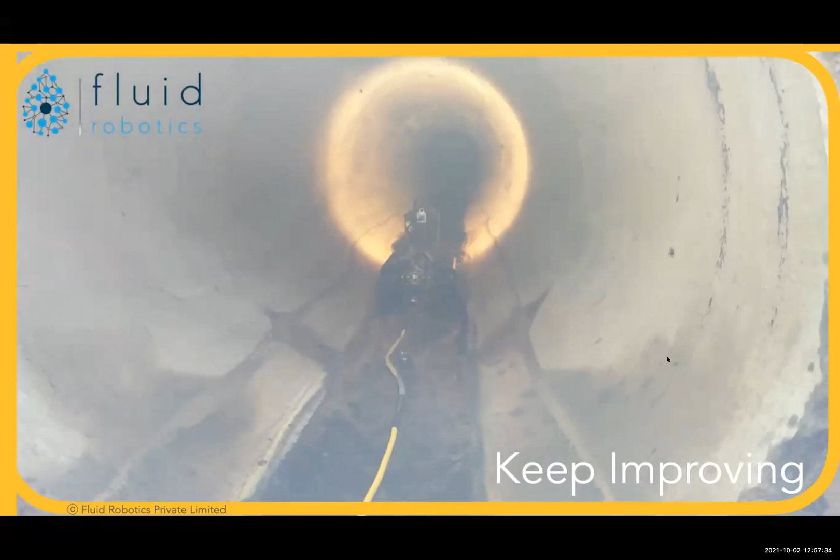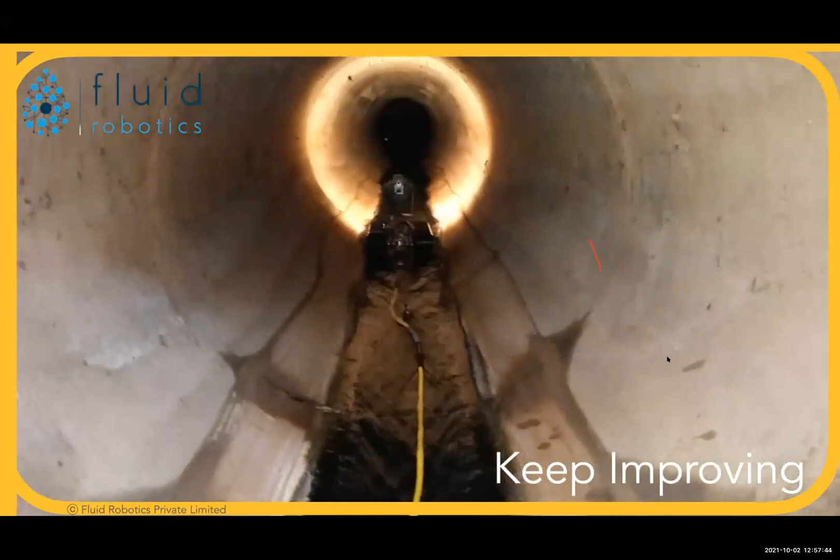So after a bunch of testing, we came to a stage where we had this robot that we were now deploying in cities in India. Once we went through the design thinking process, where we had tested the prototype and were really confident that we understood the problem, we had great ideas on how to solve it, and now we'd built a prototype that works.

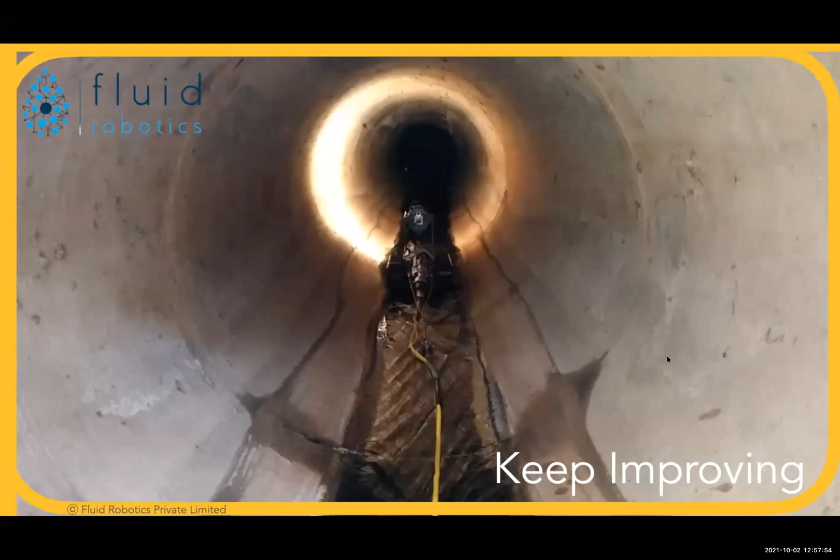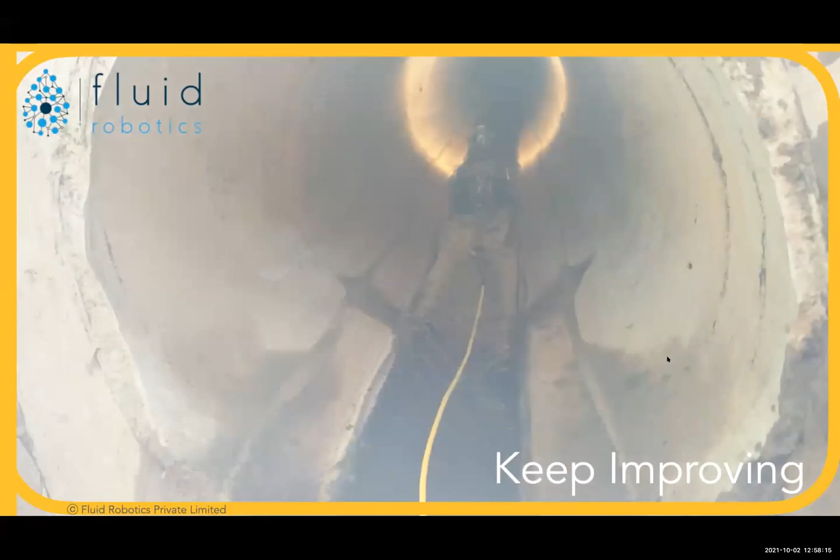All of us working on this could quit our jobs. We decided we're going to start a company, and we called it Fluid Robotics. We got this first robot deployed on projects with Mumbai City - a robot working on a real job in a real environment, trying to map out this pipe that the government didn't know where it was or what condition it was in.

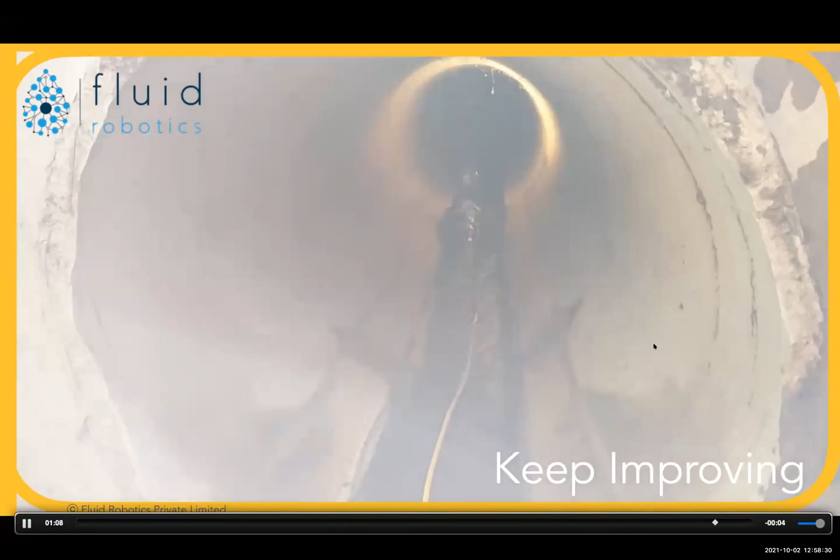So this was the process, and the process has not stopped. It's been 5 years since we put the first robot in, and the process hasn't stopped. We continue to iterate, continue to improve on our understanding of the problem, our ideas, and our technology. Today we've got a bunch of these robots traveling underground in cities, trying to identify and map out where these pipes are, helping the government really tackle urban water pollution. And this is what we've been able to manage.

Through the design thinking process, we started with one question: why are Indian rivers so polluted? Fast forward 5 years with the continuous process of iterating, understanding problems further, thinking of newer ideas of solutions, building prototypes, testing them, deploying them through this process of innovation, really backed by design thinking.

We've come to a place where we've now monitored over 1 billion liters a day of urban pollution. This is 1 billion liters of just untreated wastewater that is going into lakes and rivers across 12 different cities, every single day. Today, 1 billion liters a day that we've monitored has gone into these lakes and rivers. Tomorrow that's another billion liters a day. So this is a process that we have worked very hard to stop.

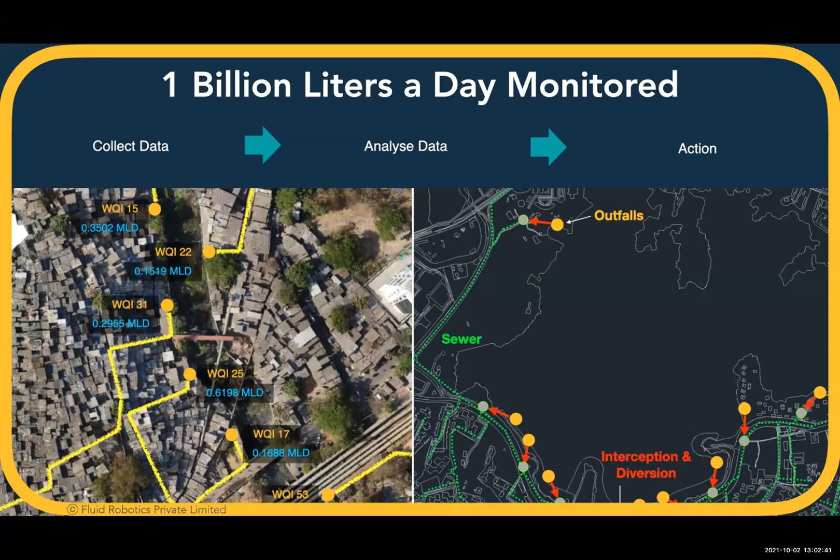A lot of times we built wrong features into the robot. We built incorrect technologies that did not have a real application. We did that in the process, but making those mistakes taught us what the right decisions were. It's very important in design thinking to take decisions. Decisions are going to drive growth, they're going to drive innovation, and eventually get you to solve the problem that you're really passionate about. So today, after having gone through this process, we started with one question, one why.

Now our robots, our technology, are present in 4 different countries. This year, we've monitored more than 2 million feet of pipelines across these countries—all the water pollution that we've been able to stop. Through the process of design thinking, we've also been able to...

deploy our technology for the current problems being faced globally, which is around COVID. We've been able to send our robots into these same drains and actually test the wastewater for how COVID is spreading around communities. Today we're monitoring 8 million people every day across multiple cities to track whether COVID is increasing or decreasing. Can we actually help predict the next outbreak?

All of this has come through the process of asking yourself why as many times as you need to get to the answer you feel you're passionate about, trying to solve the problems that are really critical to help improve this world that we live in.

I'm so proud to be able to present all of this to you and see the fact that you guys are going to drive innovation in a way that no other generation has in the past. It's great to see all of you involved in this.